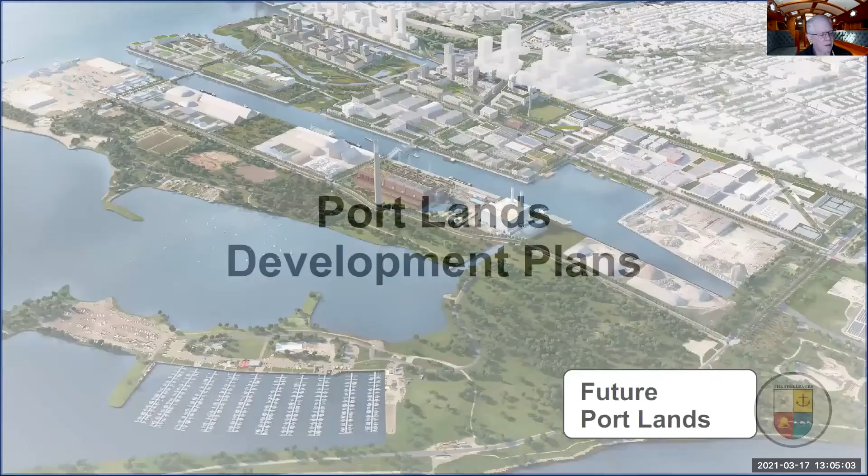But let's look at the Portlands and the development plans there. This is a view of the future Portlands, and what you see that's different from what we have now is particularly in the northwest corner. A lot of that area north of what's called the shipping channel looks quite different here, and we'll get into more detail. The shipping channel is the large watercourse that runs from the harbor into the turning basin and almost all the way over to Leslie Street, as you can see.

And then you'll recognize in the foreground here the Outer Harbor Marina and so on. We're not going into Tommy Thompson Park in this discussion, but you could consider that Portlands or perhaps not.

For the purposes of city planning, though, really the Portlands are from Unwin Avenue, which is the roadway that runs from Leslie Street over to Cherry Street, south of the Hearn Generating Station and north of Cherry Beach and so on. That's the southern boundary of what's called the Portlands.

Could you use a pointer? Yes, I think I can.

So this is Unwin Avenue running along here. Can you see my little floating hand? Yes, we can. Okay, let me pull this over to where I can.

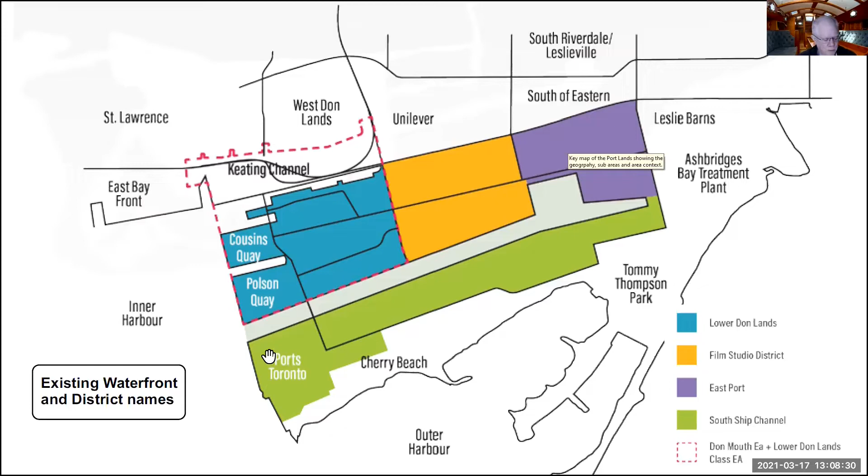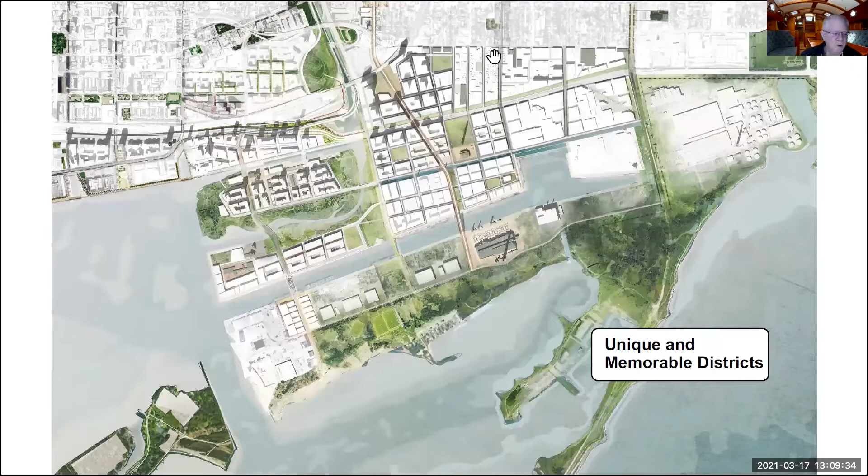However, this area has been divided into what Ports or Waterfront Toronto calls unique and memorable districts. And these are the ones. We're going to be looking more at the top up here, which is Villiers Island.

Polson Quay is here. It's named after the Polson Iron Works that used to exist up over here, but Polson Iron Works was never here. It was just where Polson Iron Works was going to go.

The South River here, and it's only called South River because there will be a river running along here on the south side of Villiers Island. Villiers Island is not an island now, but will be an island.

Over to the east, on the other side of the Don River, is what's called the McCleary District, which I'll talk about a little bit in conjunction with Villiers Island. And then to the south there is Media City. These are the studios that will be there for the foreseeable future.

And the Turning Basin District, which will remain for the most part industrial in here. And the Warehouse District up here, which will kind of stay the same. The East Port is also going to continue industrial, but you can see there's a little piece right in here that will be different in the future.

And the Southport East, this is the Portlands Energy Center, PEC, the Hearn Generating Station. This is all to orient you here. This will be called Southport. What you see here, though, is also a bridge across the shipping channel that doesn't exist currently, designed as a lift bridge. There is a lift bridge here, we've talked about that already. And so then you also get back to the property here with Ports Toronto.

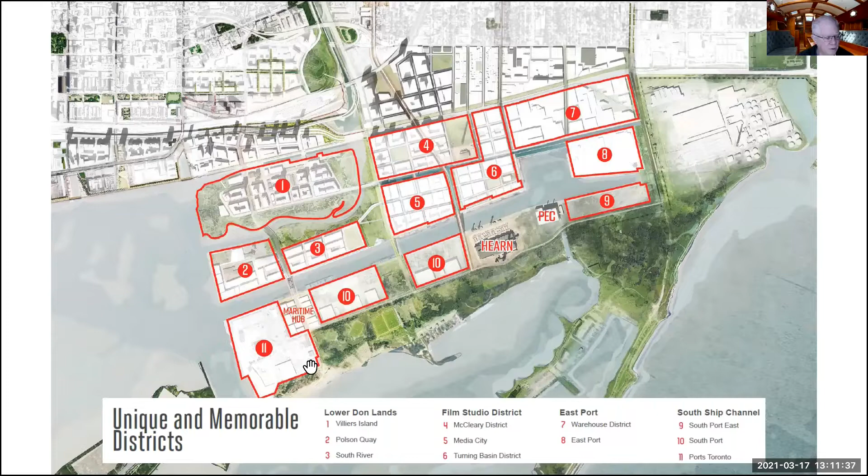The planning for this whole area is in more than one city plan. The Portlands Planning Framework is dealing specifically with the green area called Portlands. The Villiers Island precinct plan is a subset of the Portlands Planning Framework. Then there's the Portlands and South of Eastern Transportation and Servicing Master Plan, a long title, which covers some of the Portlands but also extends eastward a bit to points east. Those planning structures are all part of the Don Mouth Environmental Assessment and Lower Don Lands Class Environmental Assessment. There will be further precinct plans for the Film Studio District and the South of Eastern Strategic Direction as they roll out.

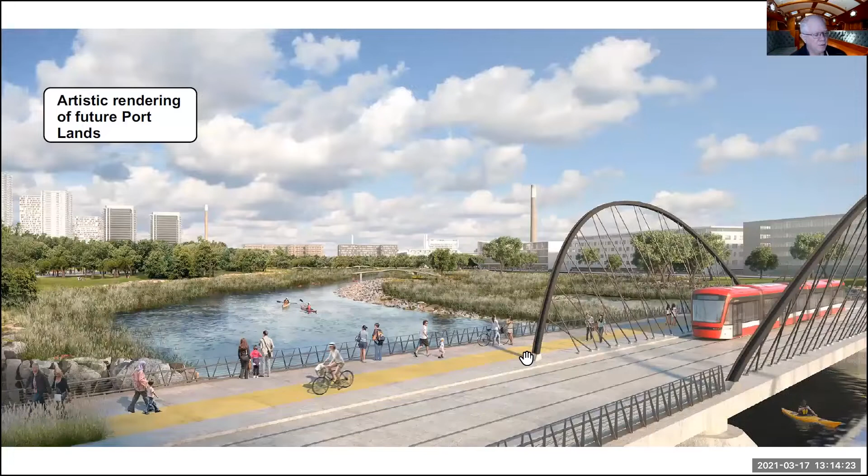This is another so-called artistic rendering, looking eastward from Cherry Street, where a new bridge will exist. The bridge won't look like this; this is a slightly older image, but the bridge across the new segment of the Don River will be here. The sides of the Don River in this area will be naturalized, as you can see in the image. Off in the distance, that stack is the Hearn, and this stack farther in the distance is actually the water treatment plant at Ashbridges Bay.

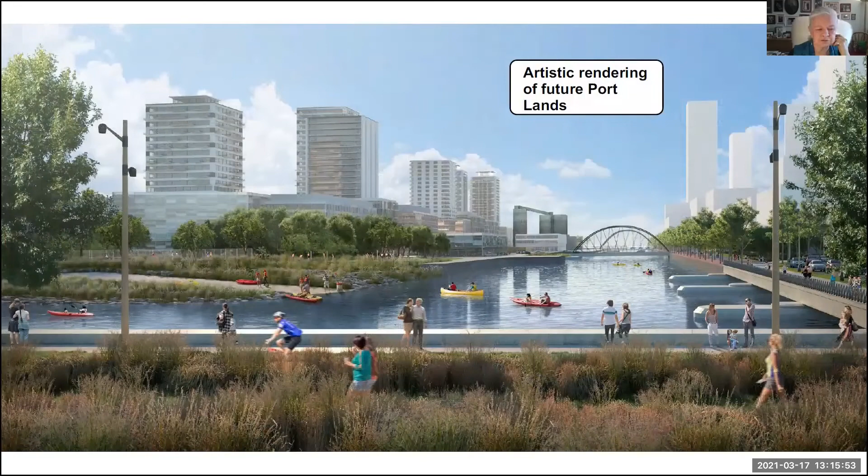I like all the green roofs. Yes, there are lots of philosophical orientations towards green uses in the area.

And this is a view, another view looking west, out the Keating Channel this way. What you see are a couple of arches here for bridges that are going to be in that spot. The Don River flows in here and currently just has only one option, a 90-degree right turn, but it will also now have a southward option to encircle Villiers Island going this way.

Now, complicating this, of course, is who owns what. This is a current, or relatively current, Portlands ownership map. I say relatively current because this piece of land is no longer provincially owned - that's the Hearn, the province sold it to private interest, and we don't really know what's going to happen there. But you can see a few things here. This is Ports Toronto, and this lift bridge, the Strauss lift bridge, the green one that's there currently, is also Ports Toronto property.

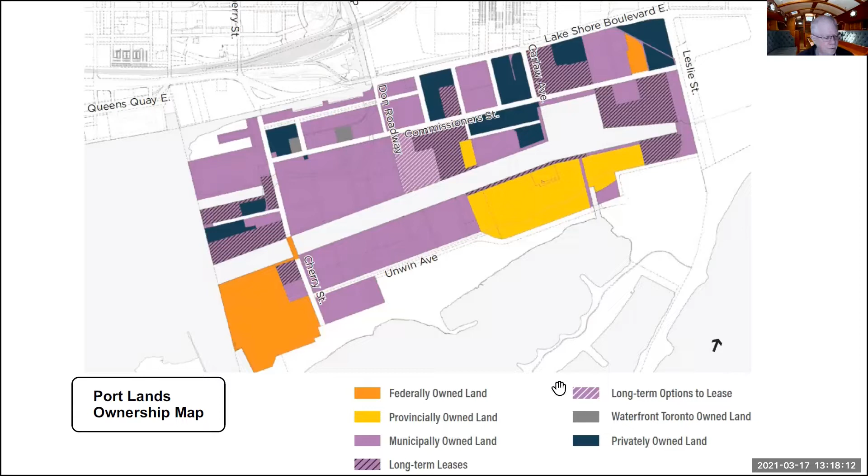And you can also see Waterfront Toronto owned land, really just a couple little patches in here.

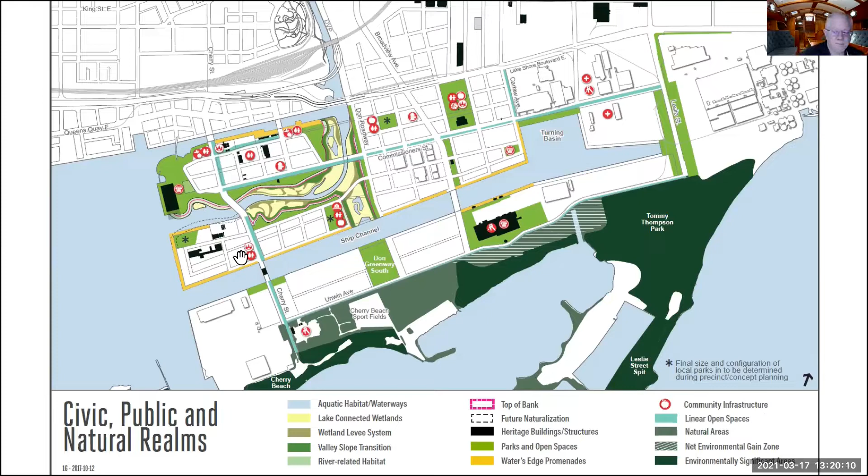This connects the images to civic, public, and natural realms. So what you're seeing now, if you concentrate on the green—don't worry about Tommy Thompson and Cherry Beach—the green north of the shipping channel and surrounding this area is new green in the sense that a lot of it doesn't exist now. Especially this area where the Don River comes south of Villiers Island now, in a created channelway. This is also a potential spillway for the Don River, if it gets too high to run along its two routes.

I think some of this is actually partly constrained by the island airport over on the other side of the harbor, because the planes need to approach and take off over this area. The only thing affecting that now is actually the stack of the Hearn generating station, which projects up into the airspace for aircraft, and they have to observe that.

This again focuses on what I was showing—the aquatic areas, natural areas, and aquatic habitats that will be in this area here particularly, and a little bit south in here.

The street network will remain much the same. There will be some new streets created, and Cherry Street will change significantly north of, say, about where the Cherry restaurant is here. It will bend out to the west and travel up this way and cross new bridges that will be built. One is built now and in place, another one will go in soon.

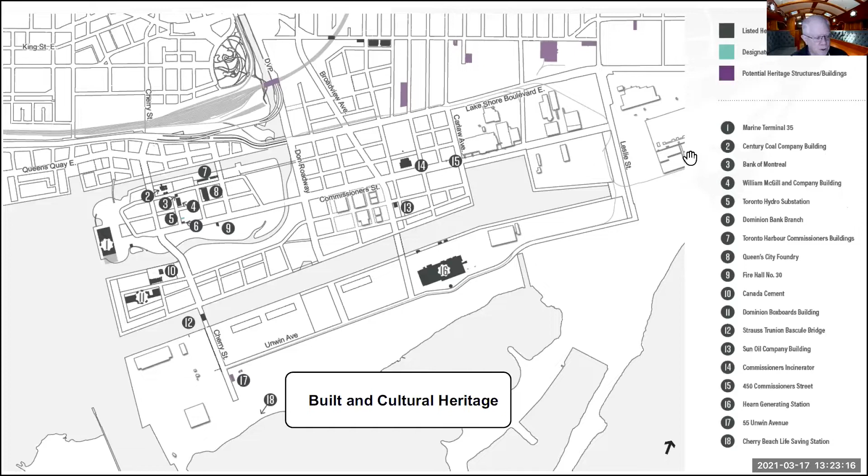There's also an existing infrastructure of buildings, what they call built and cultural heritage. Your sense of the value of these is probably not what you might think—city planners are preserving things that, in some cases, I would say, who cares? But in a lot of cases, they intend to repurpose them as well. So there's a list of them down the side here, but I think we can get a better sense by actually looking at some things.

The Marine Terminal 35 was in the planning as part of the built and cultural heritage, but if you might recall, what was it, 3 or 4 years ago, it had a big fire and most of it burned down. The Atlas crane exists, and plans to leave it in place exist as well—you'll see where it goes in a bit.

Obviously, the Hearn's 213-meter-high chimney stack—this is over 600 feet, I guess it's around 650 feet or a bit more, pretty high. And then other stacks here are the incinerator and the water filtration plant.

Transit plans and cycling plans. I won't go into detail here, but basically the Portlands will be served with an LRT, and the LRT will run in from the west along Queens Quay and come down into the Portlands over one of two new bridges that will go in here. The thing the city's trying to work out right now is how to connect this LRT running on Queens Quay to the LRT that goes west on Queens Quay and up into Union Station.

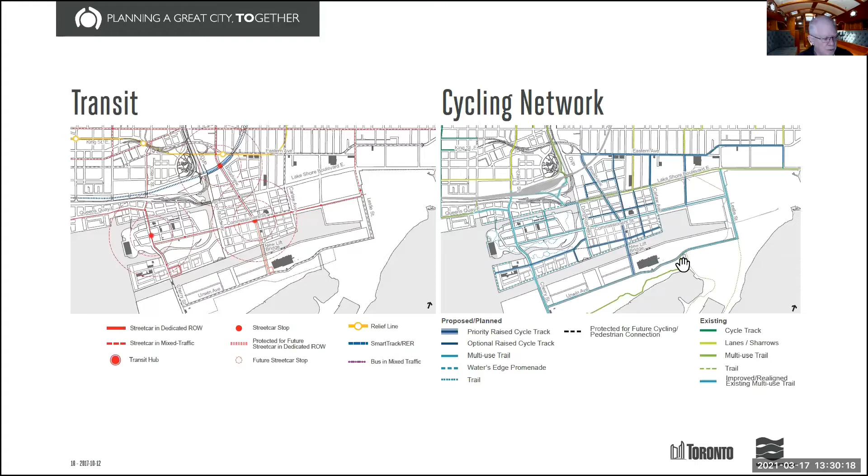It's a bit of a complicated bit of planning because there are sewer lines that would have to go underground at some point, and there's a hotel there with a bus depot in front, and Yonge Street Quay - or Yonge Street Slip - it's complicated. Cycling is a little simpler, but there are cycle routes planned for the Portlands.

There's also a land use plan - this is the Central Waterfront plan, and the areas that they identify in the Central Waterfront plan. I'll just zoom it in a little bit so you can see it better.

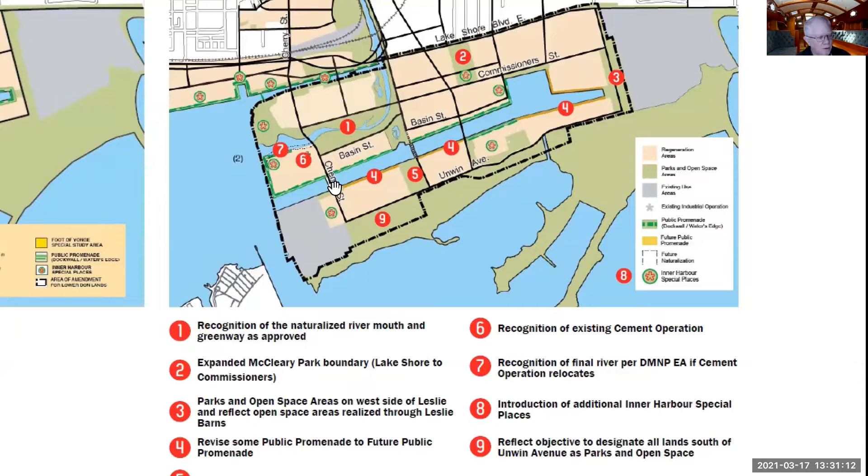Here is a naturalized river mouth that we've talked about a few times, and the expanded McCleary Park where that incinerator is. Over here is the greening of Leslie Street with parks and open space areas. Down here it's not so well defined, but it's meant to revise some public promenade - there may be a promenade people could walk along the south side of the shipping channel. And then a little green patch to the west of the Hearn.

The existing cement operation, Lafarge, doesn't want to move, so they're going to stay there. Then there is a concept here - it says recognition of final river, per the environmental assessment, if the operation does relocate.

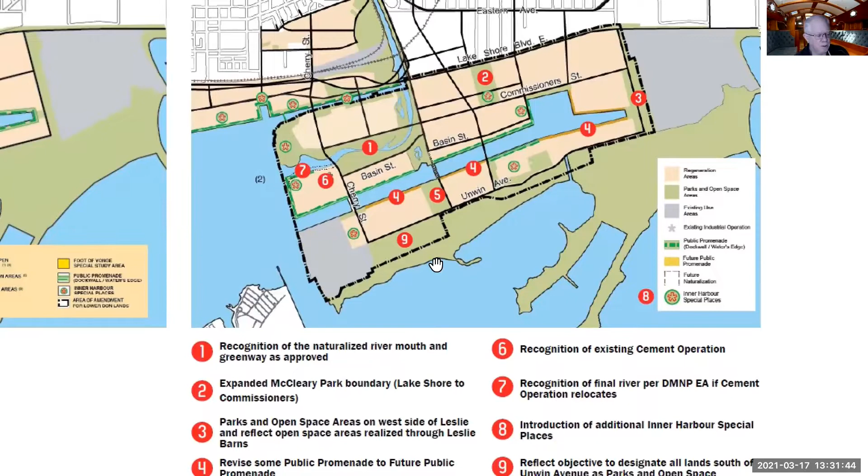And then there is the introduction of additional inner harbor special places, marked here as number 8. That's actually misplaced here - it should be up in here.

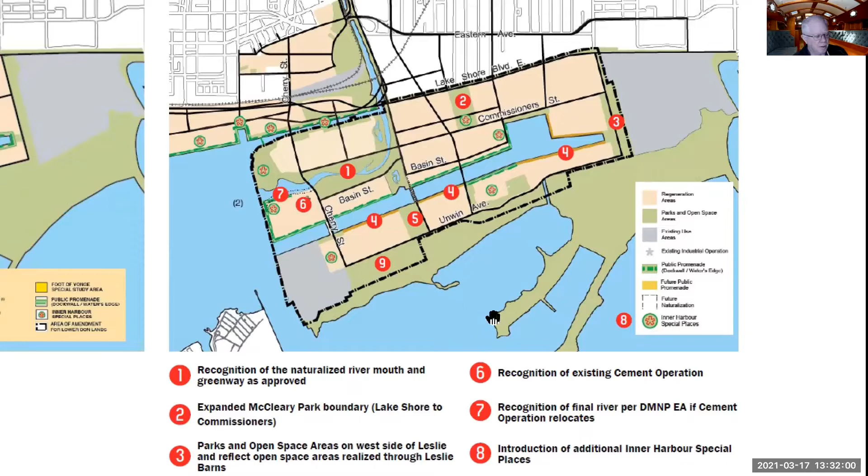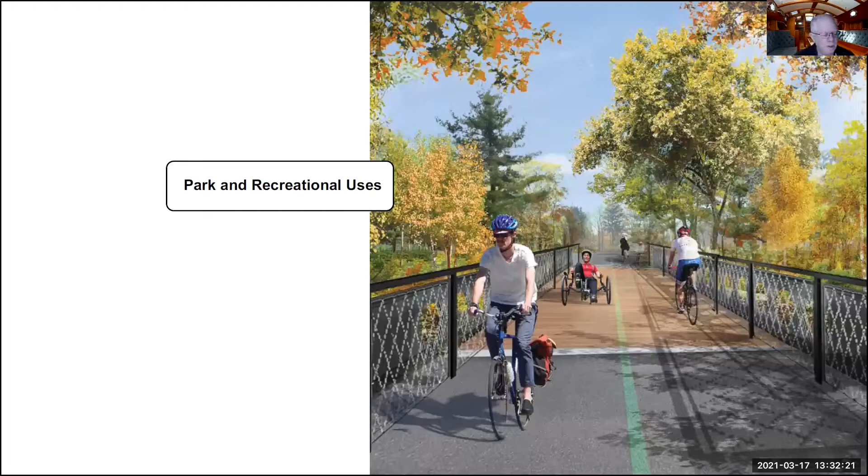Generally, there's a lot of emphasis on parkland and recreational use being promoted through the Portlands development.

Another is the Jack Layton Ferry Terminal itself. And then two more are located on Villiers Island. One is a destination playground, and another is a landmark institution. These are very vaguely defined. But what they have in mind for the destination playground is something that is both for the communities in the area and for general use.

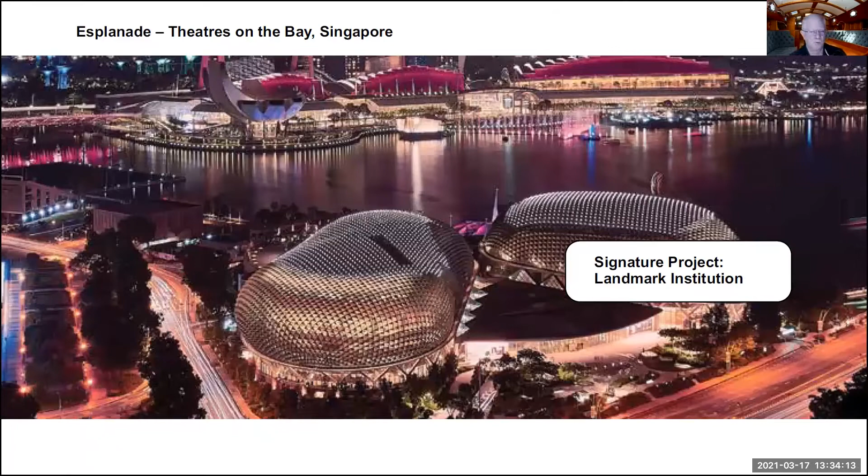This is not anywhere in Toronto, this is Singapore. But this is what they cite as an example of a landmark institution - in this case, theaters located on the bay in Singapore. They look at the Sydney Opera House, they look at a lot of things, and they think Toronto could have something like that.

Another signature project is the continuous waterfront walk - some of it already exists. This is the Water's Edge Promenade in the East Bayfront, near the foot of Parliament Street. It's already in place. This is not an artistic recreation - you may have walked on that already. But extending that to the east, connecting it to the Portlands, is part of the vision of Waterfront Toronto. We'll see a little later how that's planned.

And then the other signature project is the enhanced Jack Layton Ferry Terminal. All I'll say about it right now is they plan to put a roof, and it'll be like a park on top of the area for the people standing around.

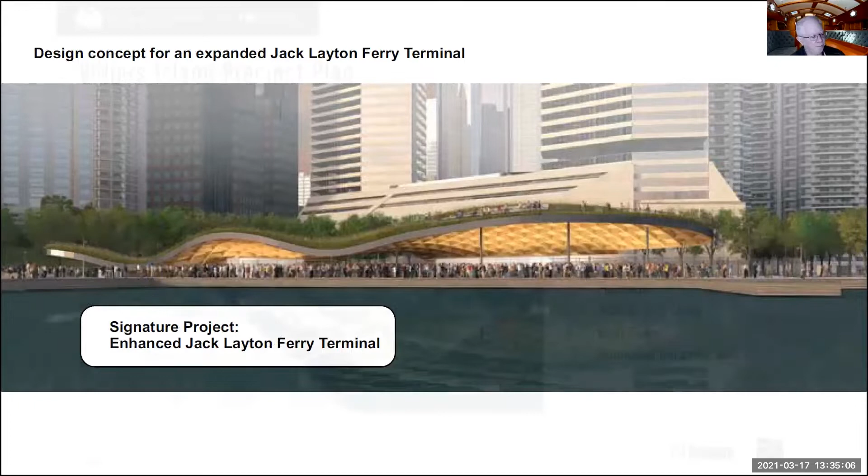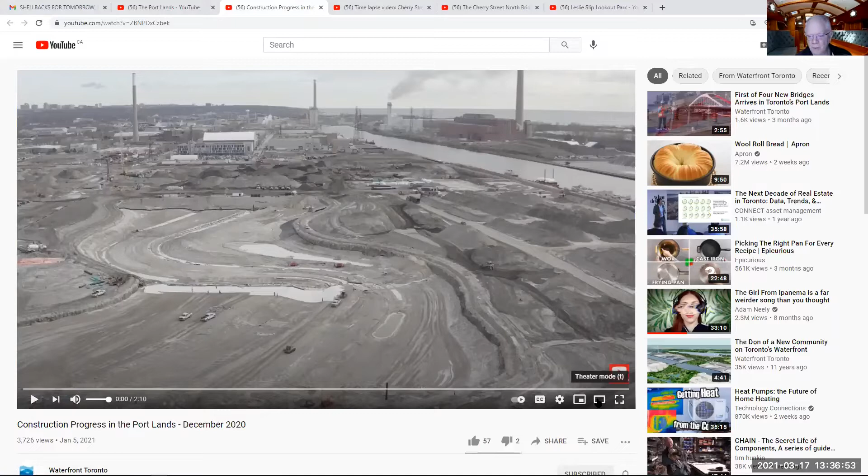What I'm going to do is change what I'm sharing to a different screen, and you get a look. This is an aerial flyby of Portlands construction. I'm hoping you can see that - let me know if you can't. Yeah, we can see it.

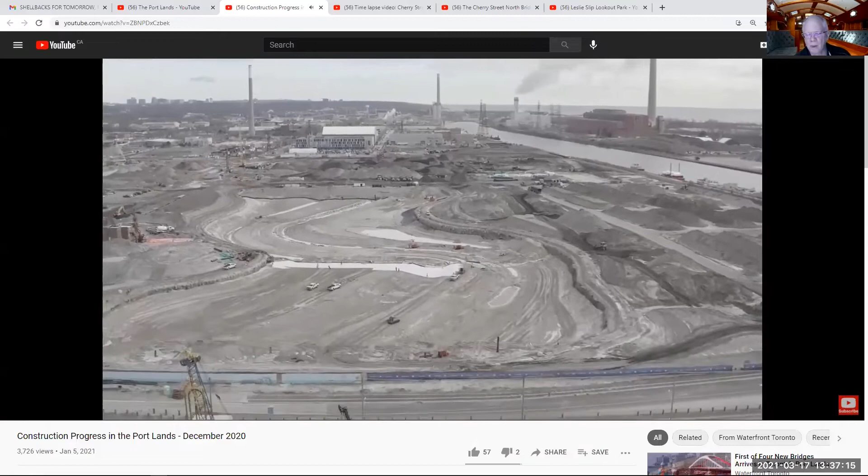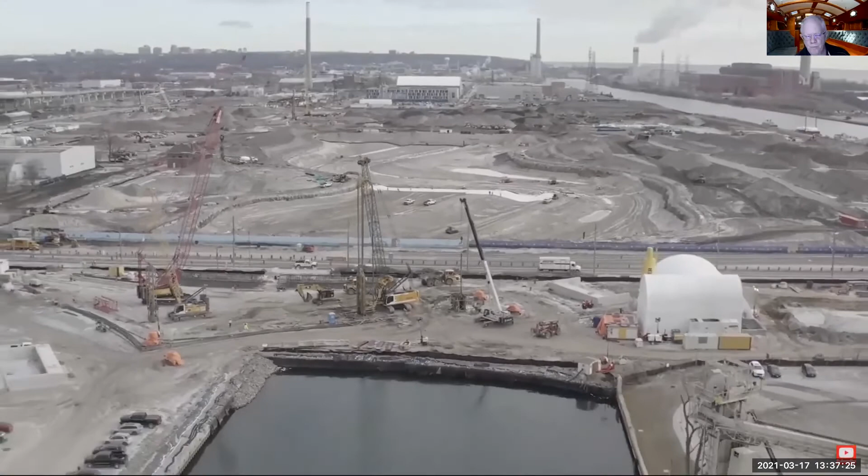Okay, I'm going to run it as video. There may be some music, but nothing more than that. Deep excavation in the Central Valley, shown here, is complete. You can see workers installing a liner - the large white sheet - to prevent contaminants from seeping up into the new river. Right now we're facing east and tracing the path of the future mouth of the Don River, which will flow out of the Polson Slip.

On the right, the large white structure is the Atlas Crane, a designated heritage structure. This area is the site of the former Marine Terminal 35 building and will become Promontory Park. The large piles of soil are where we're stockpiling some of the 1.3 million cubic meters of soil before the majority of it is treated and reused to raise grades around the site.

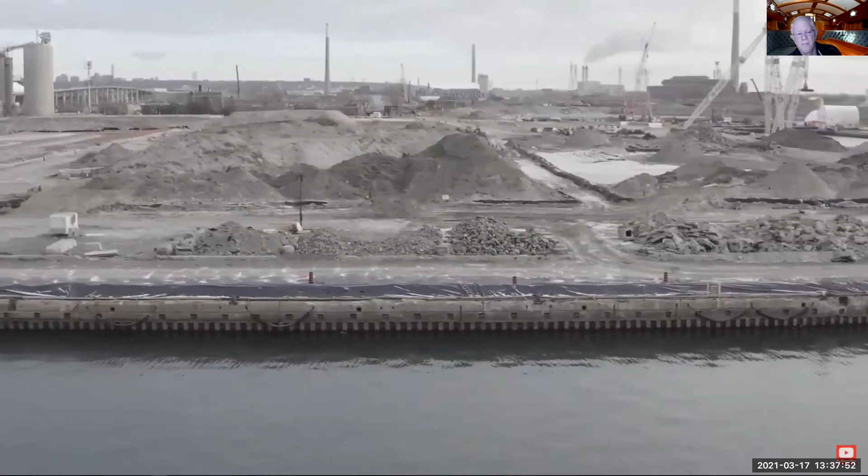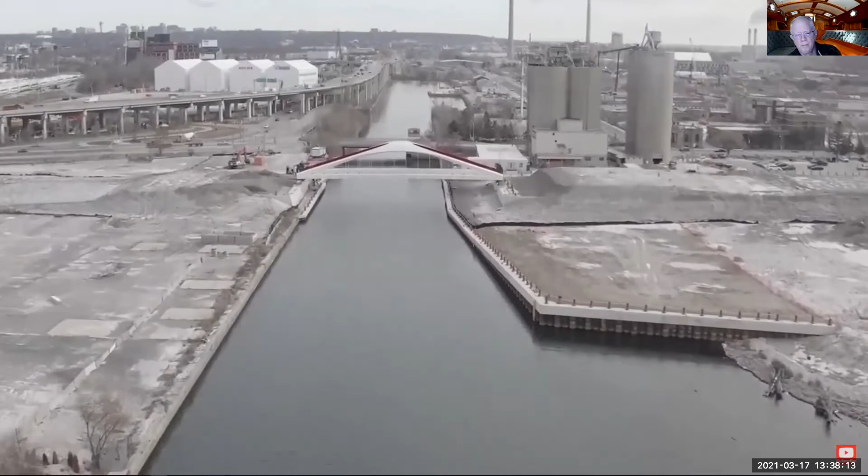The West Habitat Cove is one of two coves we created as high-quality habitat for fish and birds. This area is the Cherry Street Lake Filling Project. The channel running through it is a temporary drainage swale for stormwater. It features a renaturalized shoreline and the North Habitat Cove. We're relocating Cherry Street to allow for better connections to transit. Here you can see the Cherry Street North Bridge crossing the Keating Channel - this bridge will connect with the realigned Cherry Street.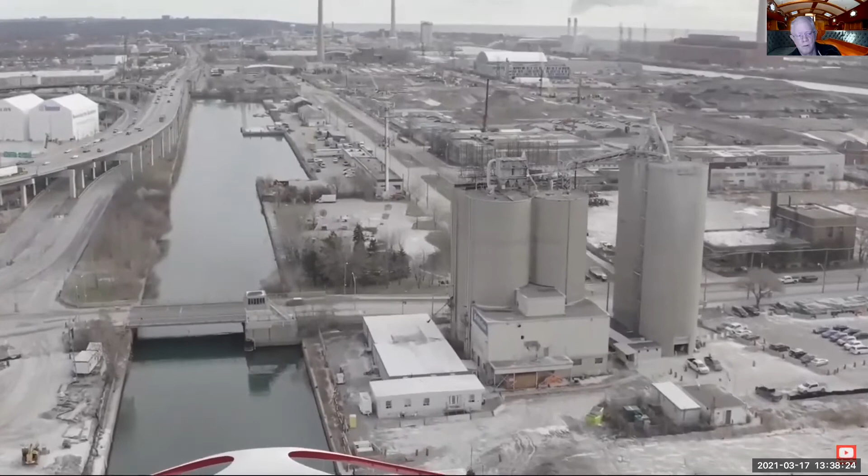The Star X soil treatment system on the east side of Don Roadway can treat up to 1,000 cubic meters of soil per week. Now we're heading south over the future path of the Don River, which currently ends at the Keating Channel.

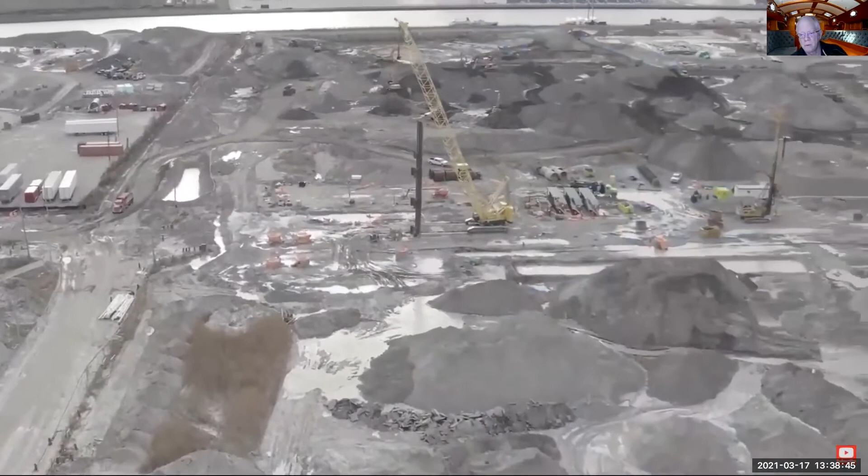Here you can see the soil management and water treatment areas. We're treating up to 1.5 million liters of groundwater per day as we excavate the new river valley.

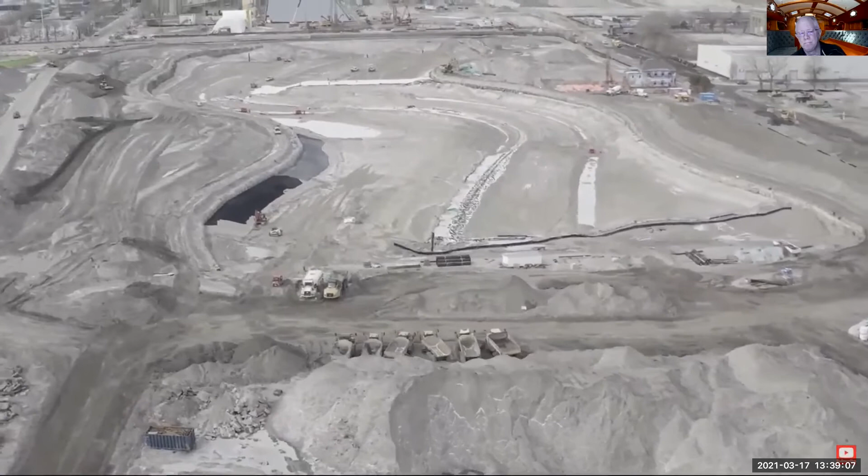Now we're following the path of the river towards the Polson Slip. You can see the outline of the Central River Valley along the edges. This is where the new river will pass under the Cherry Street South Bridge, one of four new bridges we're building.

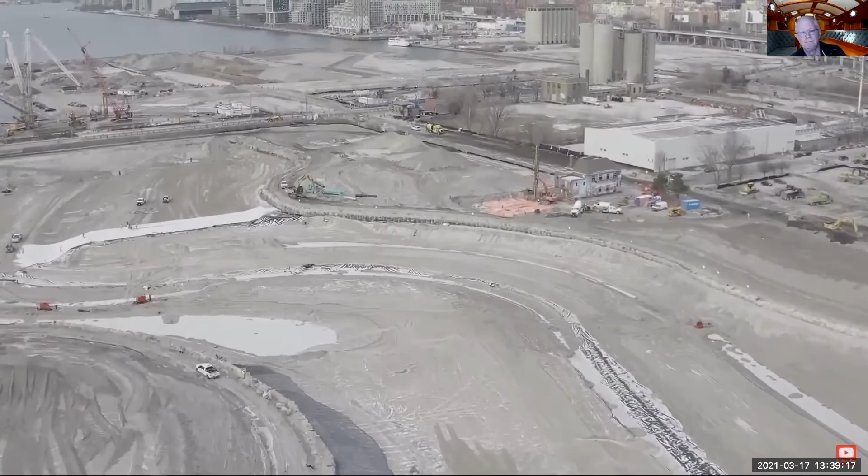Maybe a good time to show another thing is this bit here. The one you just saw is what's happening right now, that's December 2020. This is a 2016 vision of the Port Lands development, and it remains fairly accurate. So I think it's actually good to see as well.

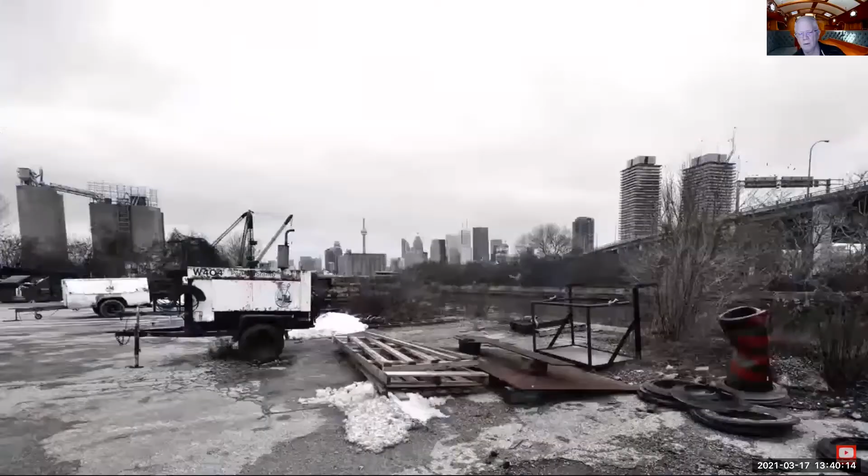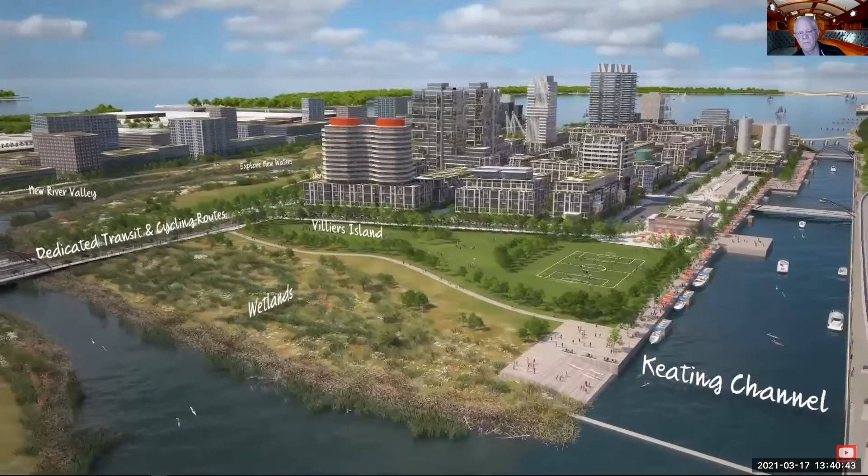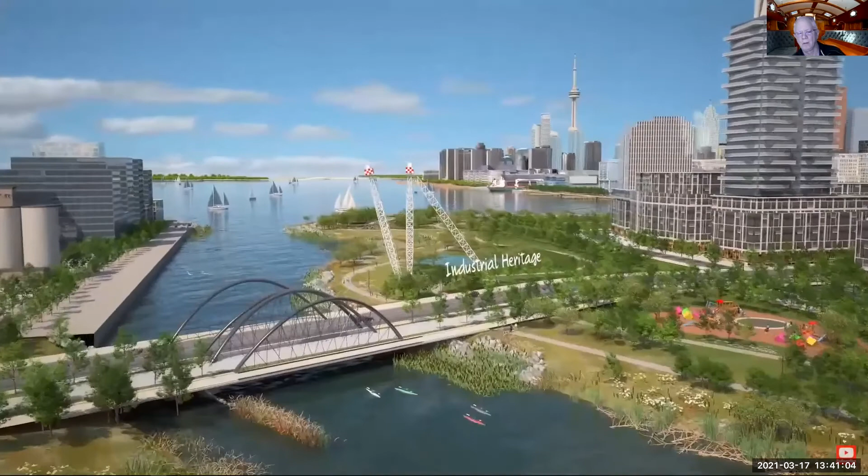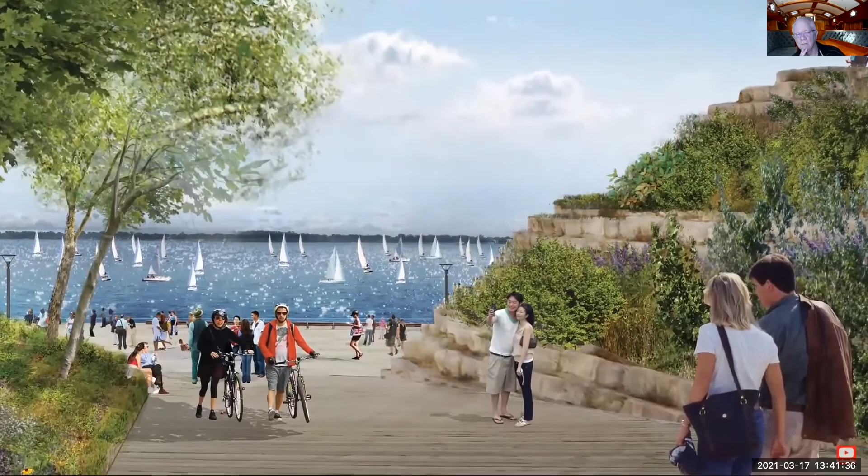The waterfront is the gateway to our city, but for decades, Toronto's Portlands, just east of downtown, has been overlooked. Nearly 1,000 acres of waterfront land sit underutilized in the middle of a floodplain, its potential unfulfilled. But a new, reimagined Portlands is coming. Beginning with restoring the mouth of the Don River, a new river valley will be created to safely channel floodwaters into the harbor. New wetlands will enhance biodiversity, helping to clean our air and water and allowing wildlife to thrive. A new community, Villiers Island, will emerge. This is an opportunity to showcase smart, sustainable, low-carbon city building, a global model for others to follow, a vibrant community connected to downtown by public transit and cycling routes. Villiers Island will offer a mix of housing options for a variety of income levels and stages of life. It will offer valued amenities that will make it a desirable place to live, work, and play, embracing its natural and industrial heritage and contributing to Toronto's economic prosperity. Villiers Island will be a community of the 21st century, one that uses technology to improve quality of life, promotes active lifestyles with new parkland and waters to explore, and provides new public spaces to meet and admire the views. The Portlands will no longer be a place out of reach, but a place that will make Toronto proud.

Because this is our city. This is our waterfront.

This is the checkers game where grandson and granddad will bond. This is the pool where cannonball records will be broken. I don't think we're going to hear commercials there. Okay.

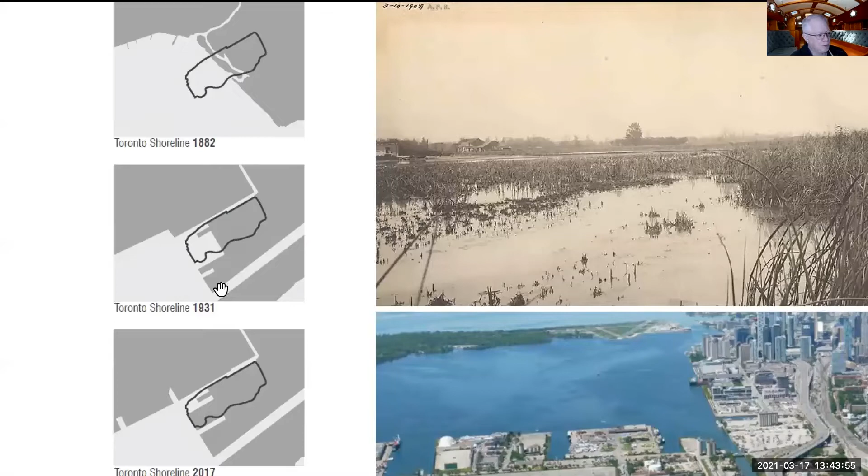The 1931 shoreline where some of these piers were built. 2017, before this work began, and this is the future shape of Villiers Island.

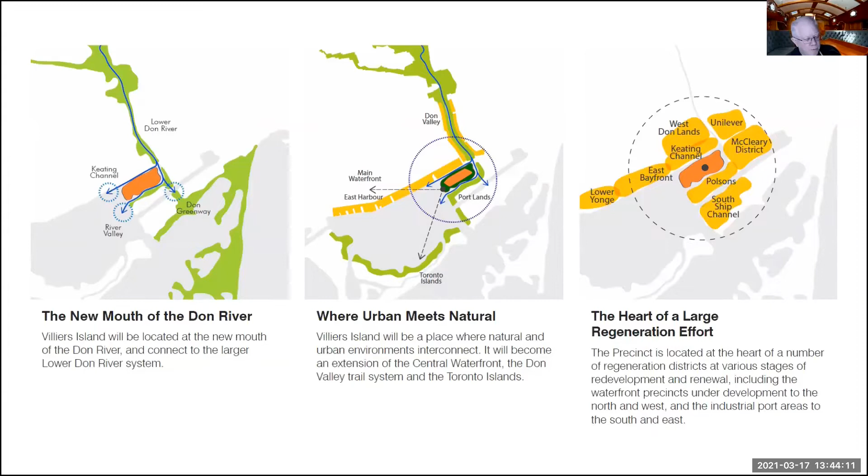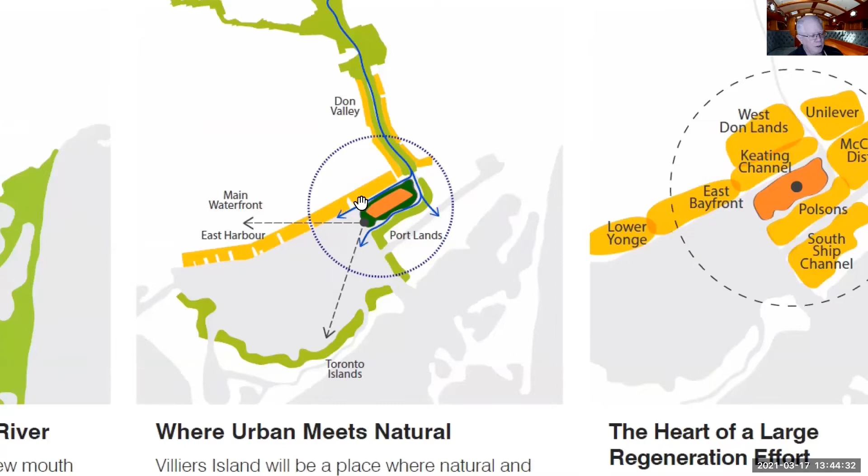And Villiers Island, these are points made by Waterfront Toronto. What Villiers Island represents in location is kind of interesting because it represents that new mouth of the Don River. It represents an interface where urban and natural meet. So you have a watercourse running here, but you also have urban right along on the North Shore. It represents the heart of a regeneration effort in these various districts, the East Bayfront, Keating Channel District, which we haven't said much about, and it's in flux. McCleary District, Polson's District is south, and the South Ship Channel. So it's sort of central in that sense.

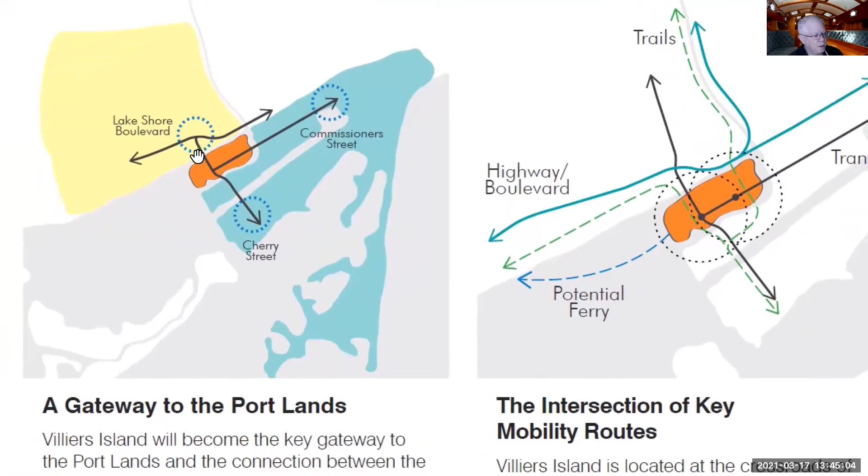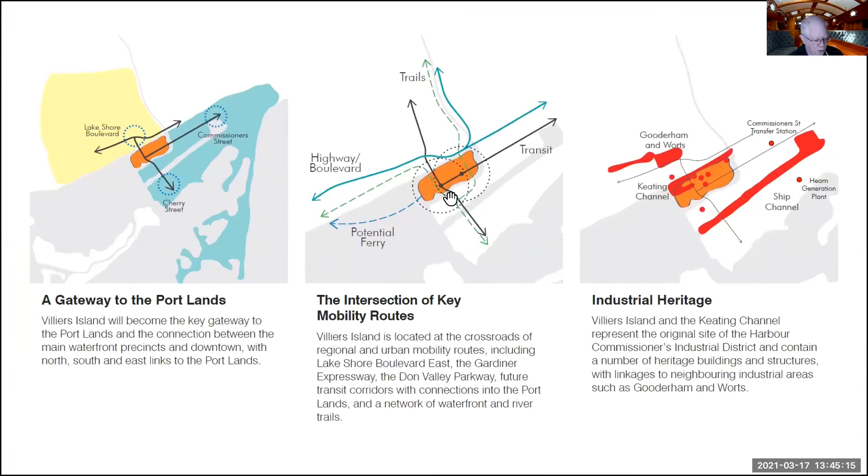It'll also be, as they say, a gateway to the Port Lands because there'll be transit connections and cycling and mobility routes running through there. And so when you think of Port Lands development, I think it does make sense logically to think first of Villiers Island.

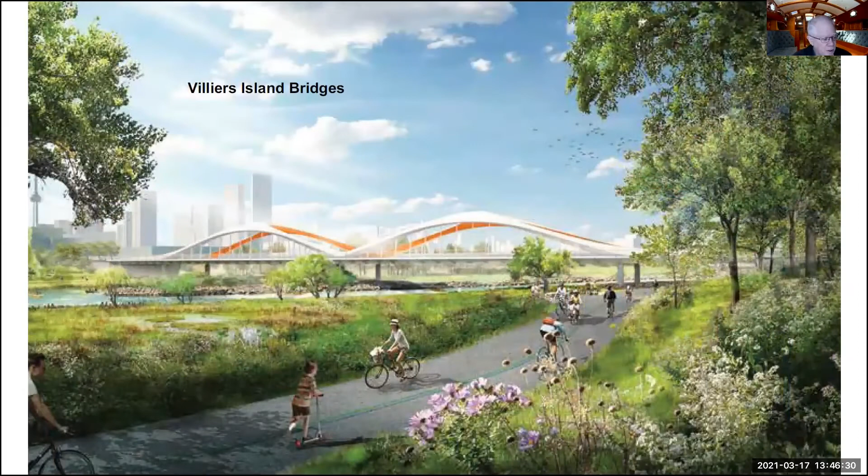There will be, in addition, other bridges here. These two are in the south, and then these two are in the east, connecting Villiers Island to the McCleary District and eastward. One will be a double span, and the other a single span crossing southward. This is Cherry Street running south from Villiers Island into the Polson District.

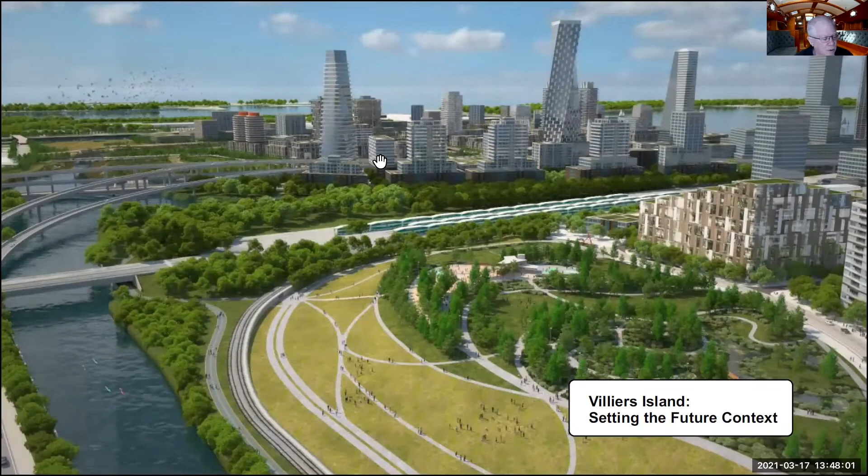And this is a similar view. This circular area here is Corktown Common, a park created by Waterfront Toronto, and then you have some GO rail trains here on train tracks. Here's Corktown Common again, and here's the GO trains. What you have now in this future vision is the Don River turning west in the Keating Channel, going south of these tall buildings and north of these not quite so tall buildings, also splitting and heading south here to go around and into the harbor there. I hope that makes sense.

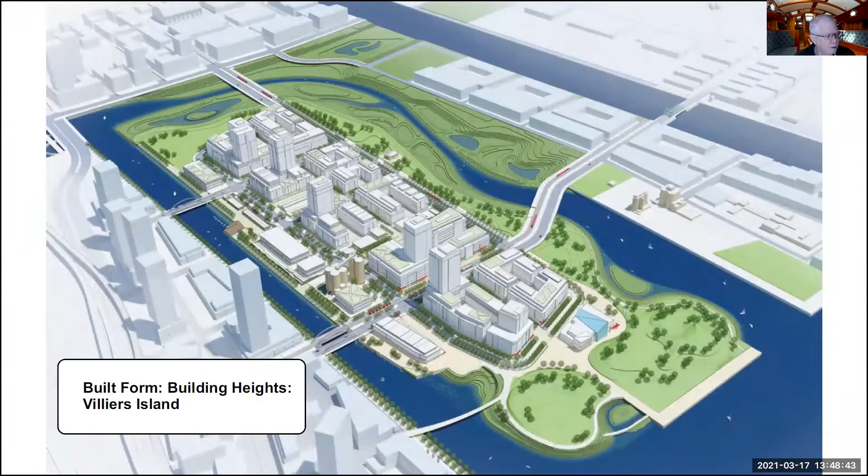Here's another view of that built form. These buildings here are conceptual in the vaguest sense - they are what is called the Keating District. A plan was formed 10 years ago, but it has had to change, and they don't know yet what to really do with it because it depends on what happens to the Gardiner East. The city voted to tear down a segment of the Gardiner Expressway East. How much of it they're going to tear down depends on city politics, but it affects what happens right in this area, and that's unknown.

But Villiers Island is pretty well known. What you see here is Cherry Street coming north, and instead of continuing up to here - that's the old Cherry Street right there - it'll bend to the west and come over those bridges that are going to be built. There'll be two here, one bridge here, and a double span bridge over here. So Villiers Island will be surrounded with bridges. And this thing is a little vague.

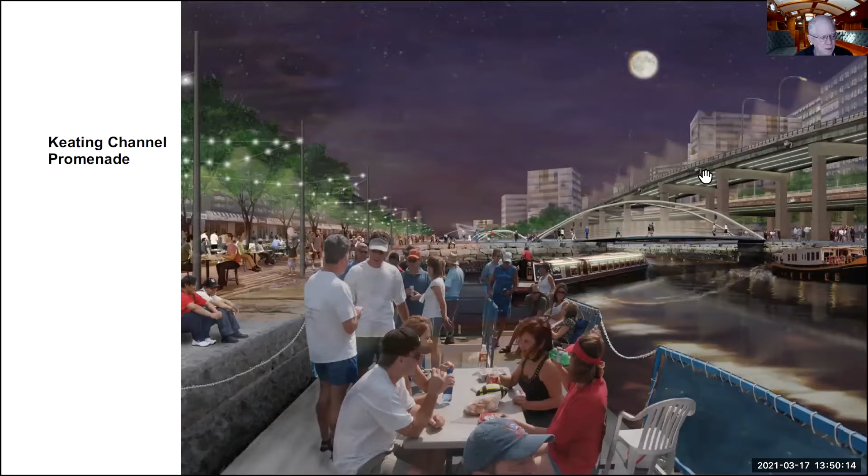So concepts here come to numbers. Villiers Island will have about 4,800 housing units, and there'll be up to 10,000 people living there. Jobs created, something like 2,900. New waterfront access will be about 3 kilometers of new waterfront and 11.2 hectares of parkland. A hectare is about 2.5 acres, I think, roughly.

Then we pull out to a different place altogether. This is what I mentioned before - the Leslie Street heading down towards Tommy Thompson Park is going to be greened, and the Leslie Street Outlook Park is another thing. So the Leslie Street Green Portal - this is traveling south on Leslie Street here, and you see it goes into the Outer Harbor. There's the Outer Harbor Marina and the spit out here. The greening is just to make a more attractive passageway and pedestrian area.

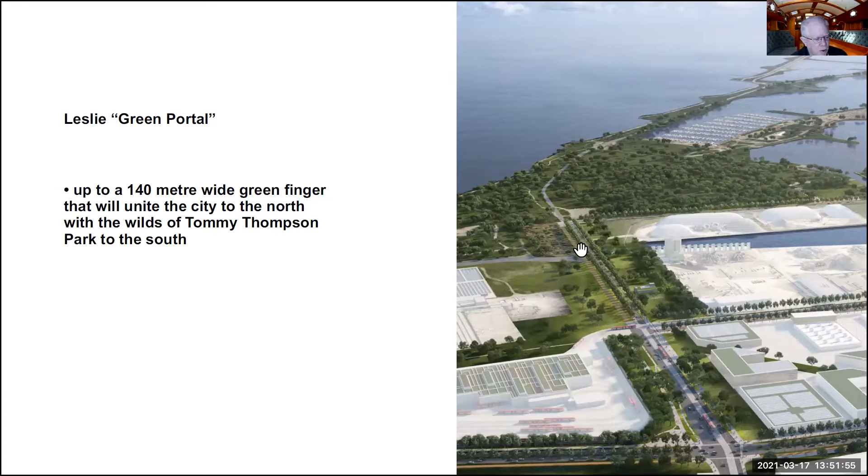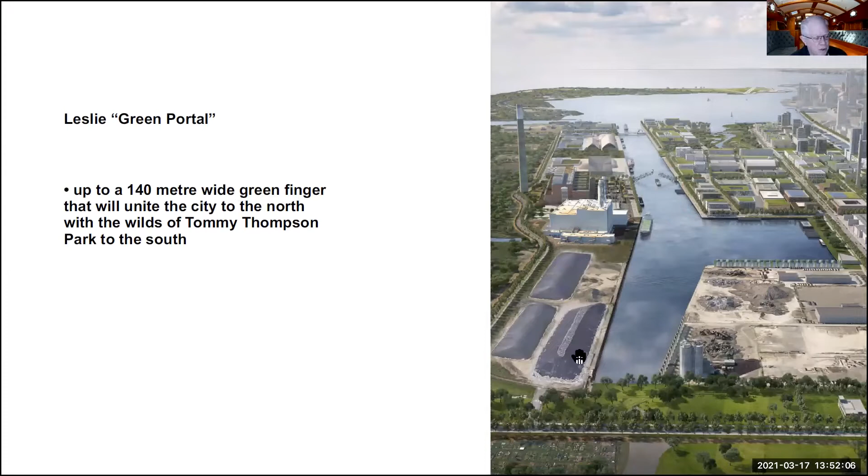This little area right here, where the shipping channel almost reached Leslie Street, is right here - this is the Leslie Green Portal. This is not a Waterfront Toronto project, it's a Create TO project. This is the end of the shipping channel at the extreme east end. Leslie Street is here, so there's only a small piece of land involved, but they are envisioning a park here with a beach - you wouldn't be going swimming in here, but it would be like Sugar Beach.

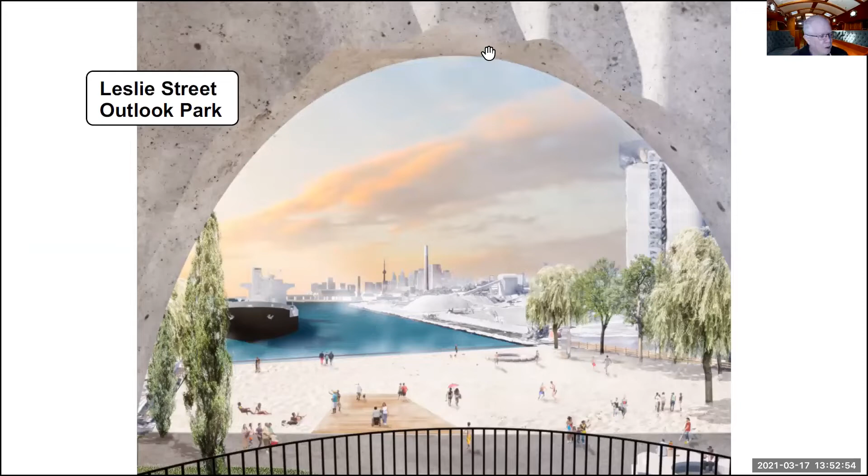And a viewpoint here, where you could look down the shipping channel to the west. This connects these views - right now it's just industrial rubble, and this would be the view from that little outlook. This idea seems to have come up just in the last little while, like in the last month or two, really.

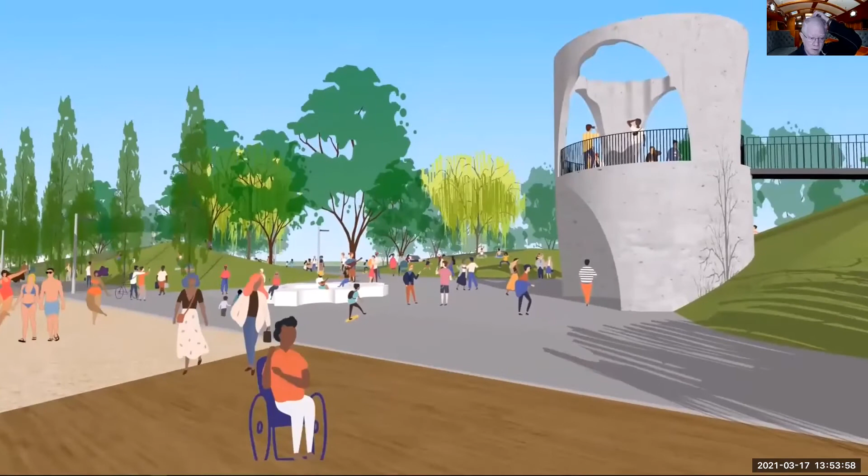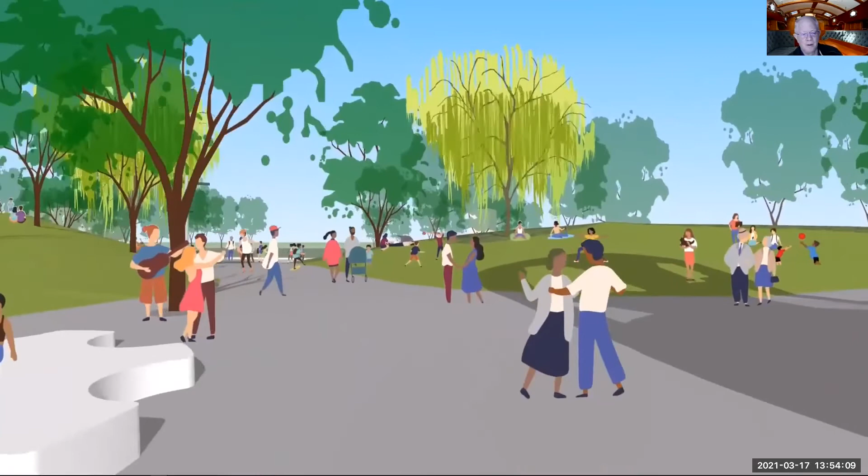There is no sound associated with this bit of video. So that would be kind of a beach right at the end of the shipping channel, and then a small area of parkland. This is kind of like a simulated drone fly through. Over to Leslie Street here, connecting to that green pathway up Leslie Street. Right now, coming down Leslie Street is not anything like an attractive travel, unless you're in a car, maybe.

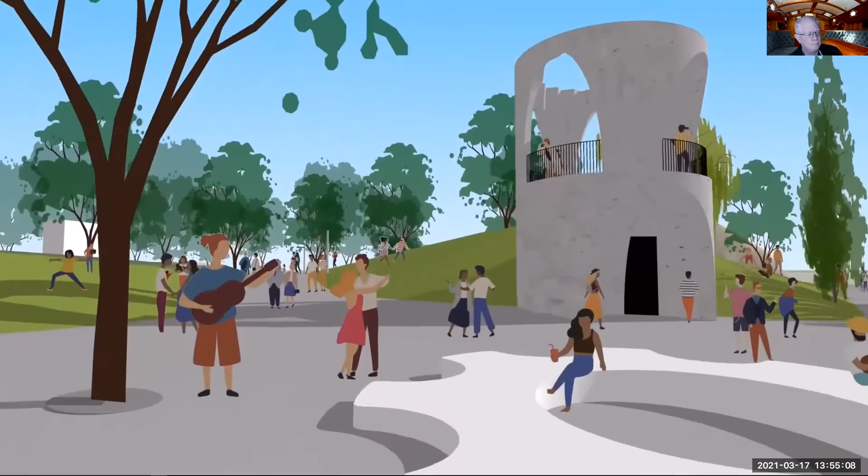I think that probably, in the interest of time, is enough. You can sort of see where it is and what it looks like, what the idea is right there.

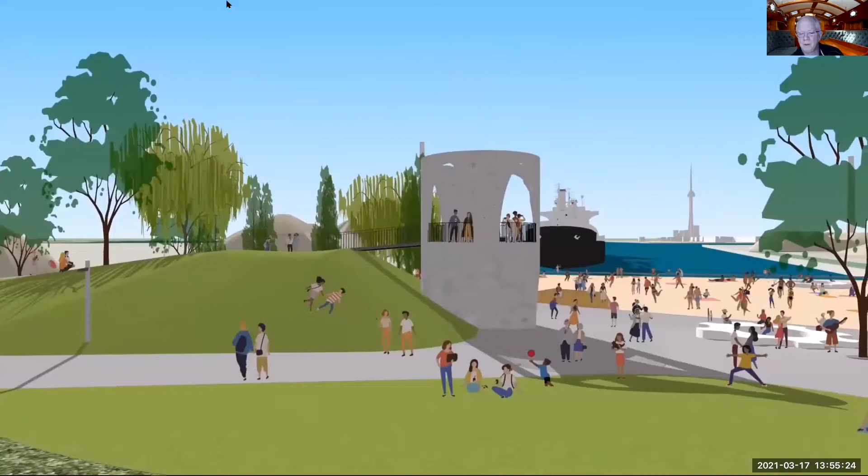Next thing I'll skip through quickly here is the Ashbridges Bay sediment and erosion control project. Nothing to do with this other stuff, but it will be something to do with waterfront change in approximately the Portlands area.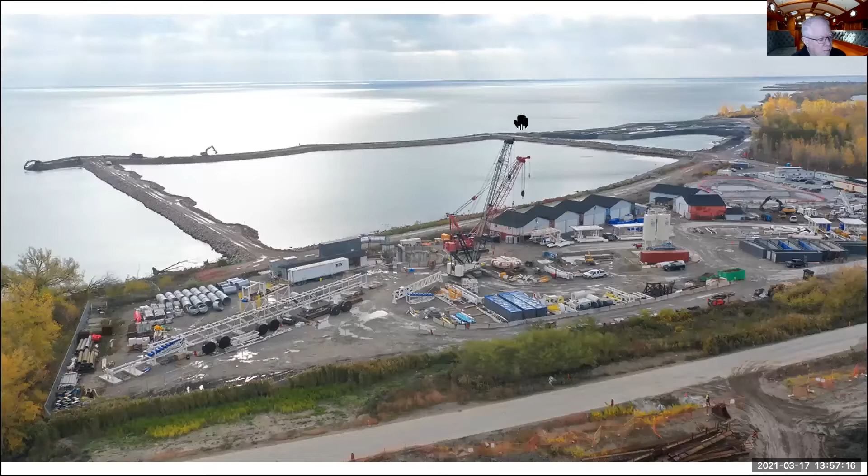These are pictures from last fall. So there are 3 cells. There are 2 here, and there's a 3rd cell under construction here. So they make the cells first, and then they do the filling inside them. So here's the first cell partially filled. Here's the second cell, and you can see what extent of lake filling is being done here. When it's completed, the 3rd cell will be here.

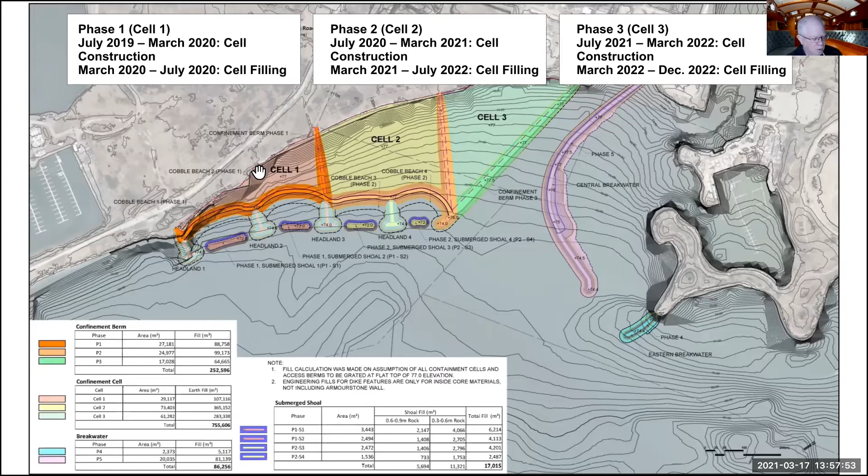Just backing up one screen, this is the 2nd cell here, and the 3rd cell is just under construction. So that will be completed out here and built in this way. This will add a whole lot of new waterfront, and I will have to talk at another time about what that will become.

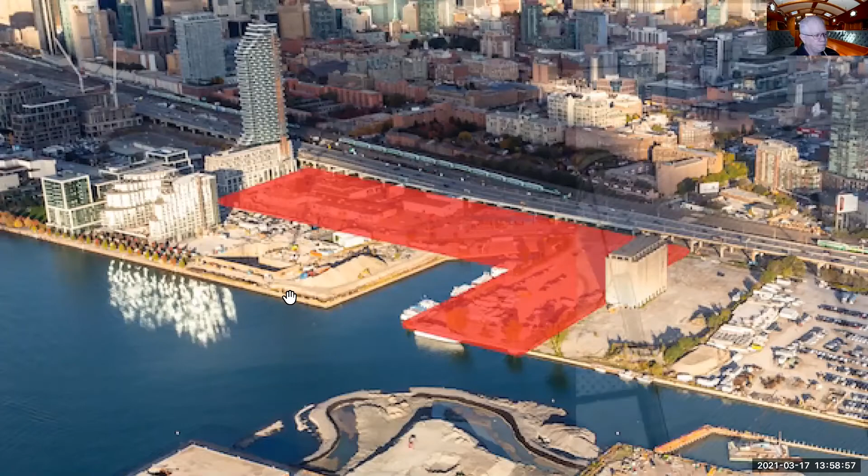That's better. So the issue of ownership inside here - Waterfront Toronto owns some of this bit of land, about 10 acres, but it also includes land owned by the City of Toronto, Ports Toronto, and private landowners. And I believe Paul Henderson was saying that RCYC has some water rights in there. But Waterfront Toronto wants to develop this land regardless of the fact that Sidewalk Labs is no longer involved with the project. So they have a request for proposals out looking for people to do something with this area. They have things that they want done as well.

Oh, I should just talk about the adjacent districts here. This is the East Bayfront precinct here, and this is the Keating Channel precinct here. And the reason I'm talking about this in the context of the Portlands is because it will connect to the Portlands in 2 ways. There will be the pedestrian walkway along the waterfront crossing over the Parliament Street slip here. And then also, if you look here, what you see is Queens Quay running east. Normally, or the way it is now, it curves and runs up Parliament Street right there. But it will continue instead running straight east and joining onto Lakeshore Boulevard further to the east.

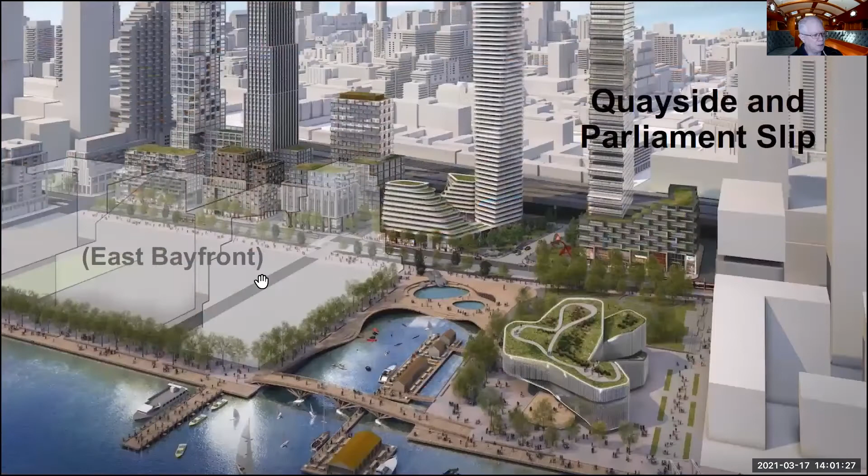This is very much a vague future, but these buildings do exist now. They're transparent in this image, but the East Bayfront buildings do exist. The issue of development is Quayside along here and Parliament Slip along here.

Ron? Yes, it's Bob Medland. At the north end of Parliament Street slip, there's a third of an acre that is owned by RCYC, I believe. Yes, Paul Henderson mentioned some ownership there with water rights as well. That's correct, and what I read here didn't specifically identify RCYC, but I think it might be this piece.

Yeah, it's the diagonal seawall. And that came originally from Gooderham and Worts, that they had a water frontage in here. So that hasn't appeared in the very public discussion, but I think it will certainly figure into things, which is why I identified this piece of ownership here. What Waterfront Toronto says now is a little bit vague when they talk about private landowners.

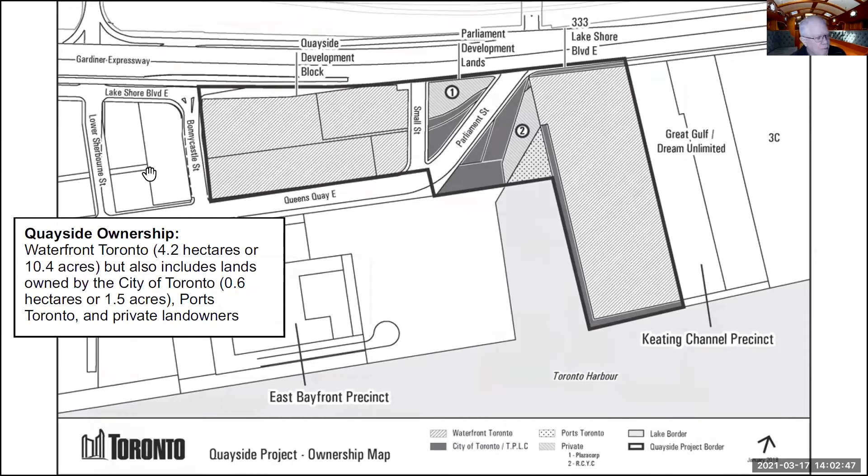Because it looks like the planning is moving ahead, or the theory anyway. But again, these are blue sky sort of visions for this area. You can see the silos have disappeared and other stuff is built in and so on. Concepts of Parliament Slip don't look very much like Parliament Slip today.

But in the East Bayfront, you do also have these buildings under construction. Aqua Vista and Aqua Luna are current projects.

And then the last thing, and I'm just going to point it out, is that Waterfront Toronto has just released this month their marine use strategy report. They've been working on it for a couple of years. It updates one from about 10 years ago. And it's not to do with the Portlands per se, but it's worth your time to give it a read. It talks about a lot of water frontage issues, ownership issues, transit lines, water transit lines, and so on. It's something to maybe talk about again in the future.

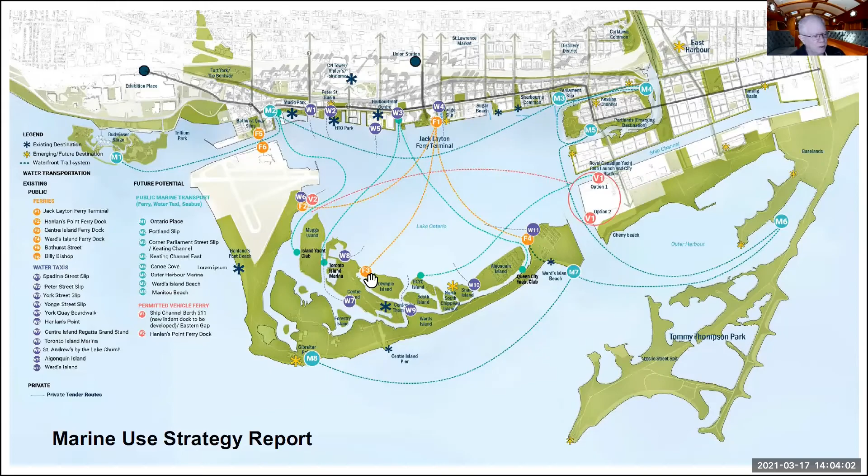And that's it. Any questions?

Okay, thank you, Ron. When they're doing these artist renditions, did anybody take into account any of the costs? Yes, but I didn't go into the budgeting of the whole thing. How is this being paid for? Well, Waterfront Toronto has about $1.4 billion from the three levels of government that connects to it. That will do the landform work, and the city will be doing some of the infrastructure like sewage and so on.

The construction will be managed the way that Waterfront Toronto has managed other stuff. This land that now is of relatively little value to the city will become valuable land that the city can sell to developers for the construction that's happening in these areas. So there is financial modeling. I didn't cover any of that, but if you go in to look at the precinct plans and the development plans, there are literally thousands of pages of information on this. They go into a lot of detail, like how the wind is going to blow around between these buildings and in what ways.

So although the artistic impressions seem very pure, they are sitting on top of all kinds of technical studies and economic studies as well. Maybe that's for another time as well.

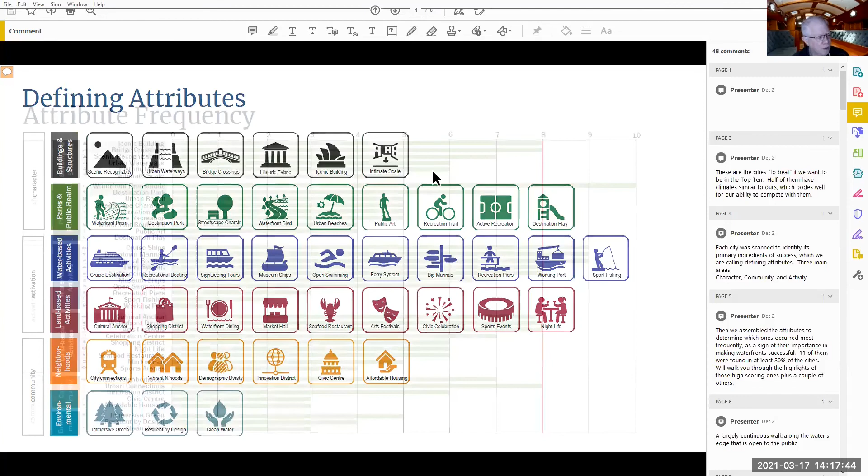This is a presentation that looks at top 10 big city waterfronts, and this was what we were just talking about here. The waterfronts that Waterfront Toronto was looking at: Stockholm, Amsterdam, Copenhagen, and so on. And what they do is they look at the defining attributes for these different locations, how frequently they're found, and what sorts of things there are in these waterfronts.

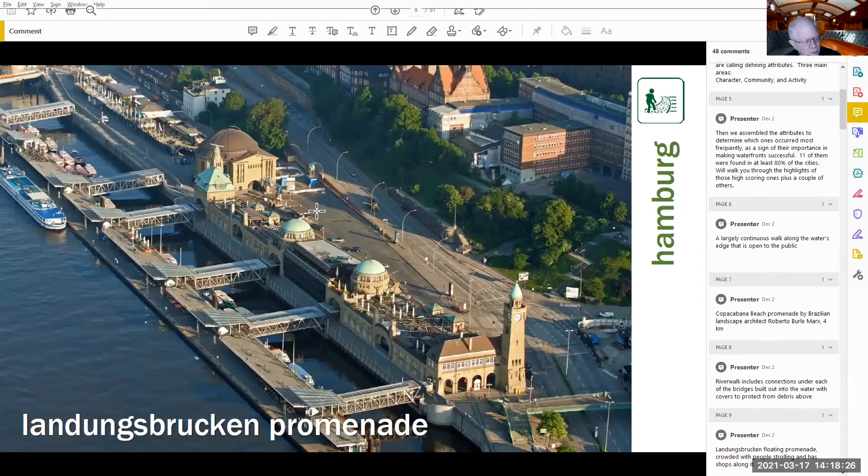Let me just see if I can... Is that a link you can send to us, send to me, Ron? Yeah, so that I can include that. Yeah, I'll put together a little set of links and references so people can look these things up themselves. But here are the things like the Waterfront Promenade and which of these waterfronts have it, like the Copacabana Promenade. Chicago's got a river walk. Hamburg has got the Landungsbrücken Promenade.

The Embarcadero Promenade in San Francisco, and so on. There was Sydney for you there too. So they're looking at various cities and what sorts of things they have in bridge crossings, things that Toronto is contemplating now for around Villiers Island and elsewhere. So they do look at other places in the world explicitly for concepts, like the idea of a destination park in Chicago, Stockholm, Singapore, and so on.